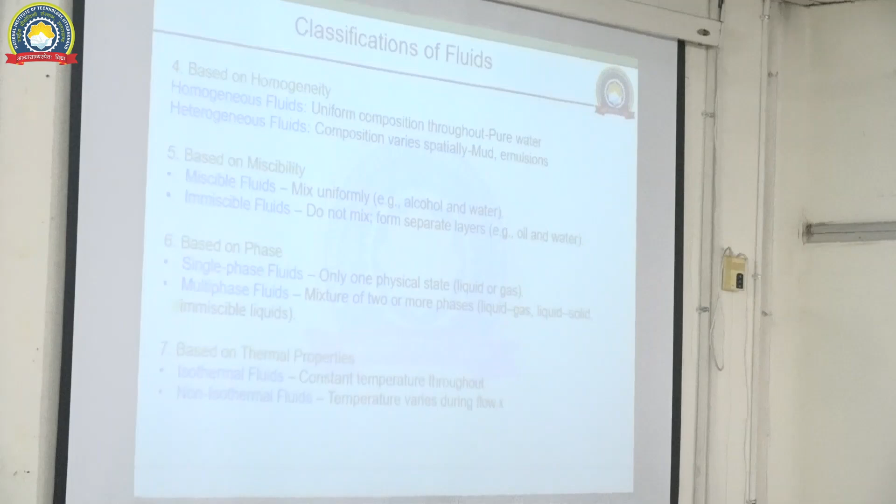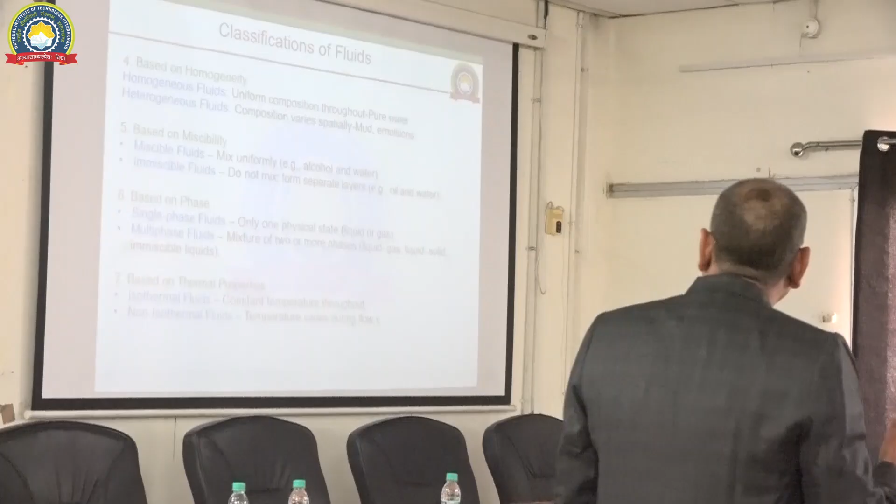Based on the homogeneity, whether the mixing of the liquid or mixing of the properties are there for the liquid, you can define the fluid as homogeneous fluid or heterogeneous fluid. Examples are there, you can read and see what type of fluid can be homogeneous in nature and what type can be heterogeneous in nature.

Based on the miscibility, when two different types of fluid are mixed, if it is completely mixable, then it is a miscible fluid. If not, examples are there like water and milk. If you mix both, it will be the case of a miscible fluid, and when you consider water and oil, it will be the case of an immiscible fluid.

Based on the phase, like different layers of the fluid, when one chemical or three to four chemicals are mixed, it can form layers. One example you can see is blood, where there are several layers like RBC, WBC, and plasma, and these are different layers. If it is only one layer, it's single phase. If two layers, two phase, three phase, four phases can be seen. So multi-phase fluid and single phase fluid you can define.

Then based on thermal properties, if there is no change in temperature, meaning it remains the same or constant throughout different compositions, reactions, or mechanisms, if you apply any type of force or chemical reaction and the temperature remains constant throughout the experiment, that type of fluid is known as isothermal. The opposite, if there is a change with respect to temperature, gives you different types.

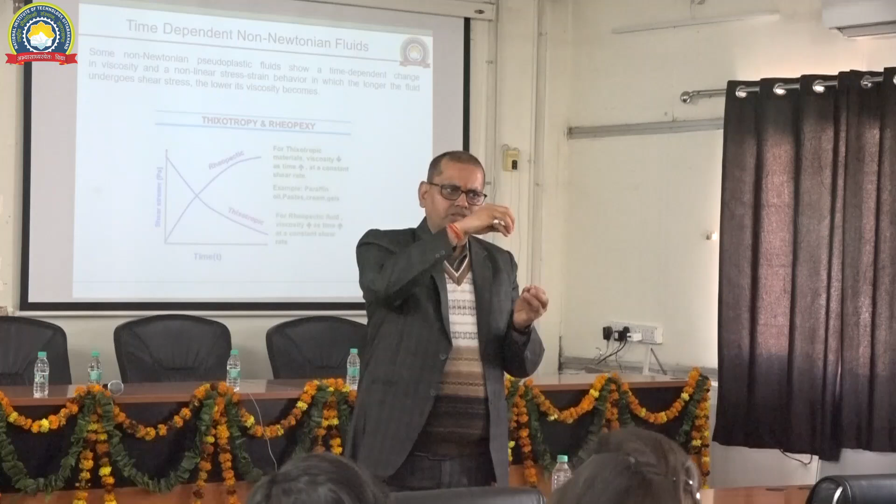So that type of knowledge should be there. So what I was talking about was fractional calculus. So in fractional models, now people have applications when there is transformation from one state to another state, or transformation from one domain to another domain. They are describing it from 0 to 1. Like if it is 0, then it is one state, and if it is 1, then it is another state. So they are using the concept of Boolean algebra from 0 to 1. The value of alpha ranges from 0 to 1, and they describe different models, like a fluid model.

But still, as I told you, the geometrical interpretation - we can define dy/dx as a tangent, as a slope, and we can also use it to define the geometrical shape, whether it is convex, concave, or finding the maxima and minima. We find the critical nature of continuity. So all these geometrical properties you can find using simple derivative. But for the fractional derivative, if it is d-half y upon dx-half, what will be the geometrical properties?

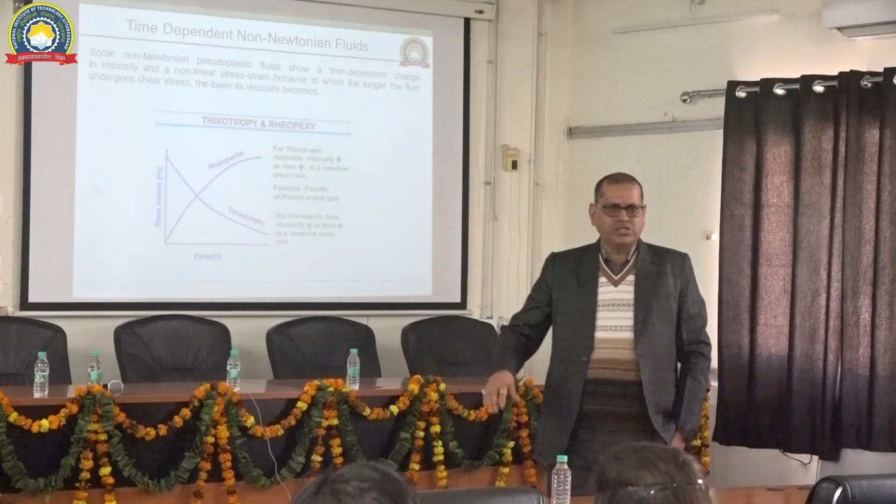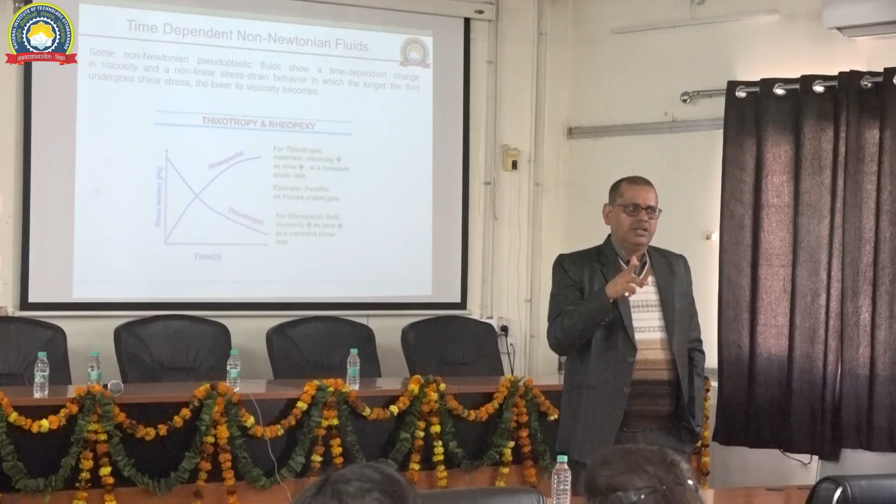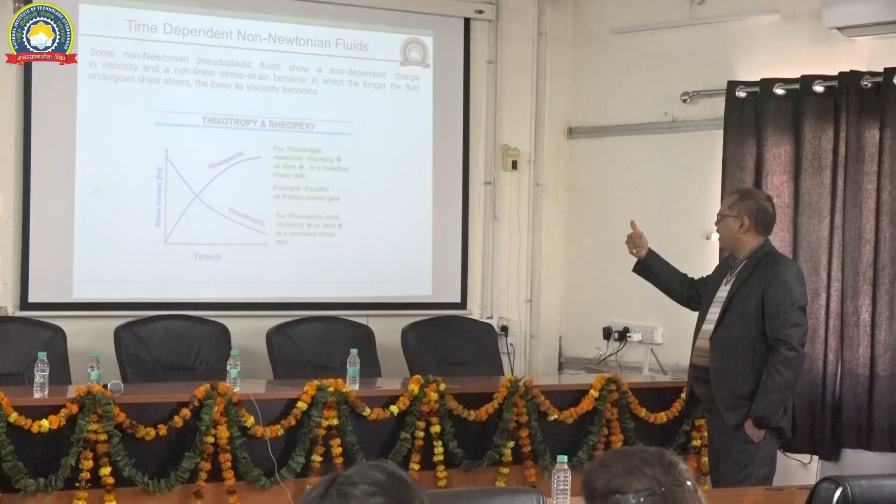These are the different models where you can see, and as I told, if the viscosity is depending upon time, you can describe different types. In time dependent non-Newtonian fluids, only two types exist, and very few people work on this. One is thixotropic and another is rheopectic. In these fluids, viscosity is the property which depends upon time - in one case it increases with time, in another case it decreases with time.

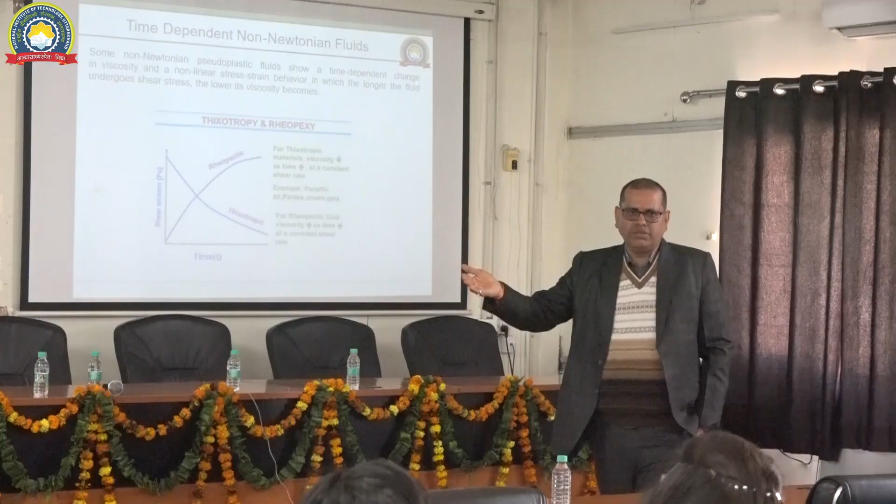This is another type of nature. Some models I have not taken the expression for, but you can find where people are working, taking different fluid models in different types of applications and analysis. One reference I have given you where you can find this is based on food products.

Most food products you can find in lunch, dinner, and for animal foods, for other living organisms, different types of food products exist, and you see what will be the rheological or physical properties of those food products. Many people are working on their purity and digestion purpose, figuring out which food is comfortable for a particular reason.

That's why different regions have different food cultures, and people eat based on the environment and depending upon water properties. When you are habitual to Uttarakhand and go to another place, you can have problems for a few days, and again you become habitual because your biological system adjusts with these properties.

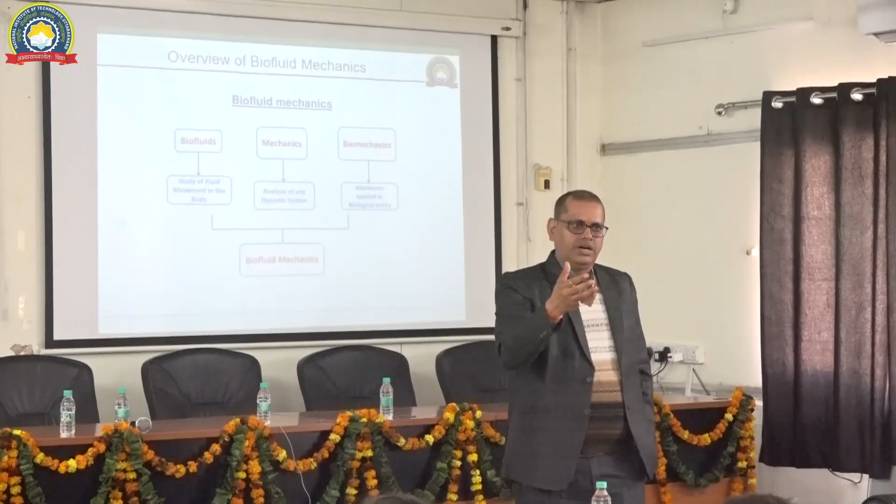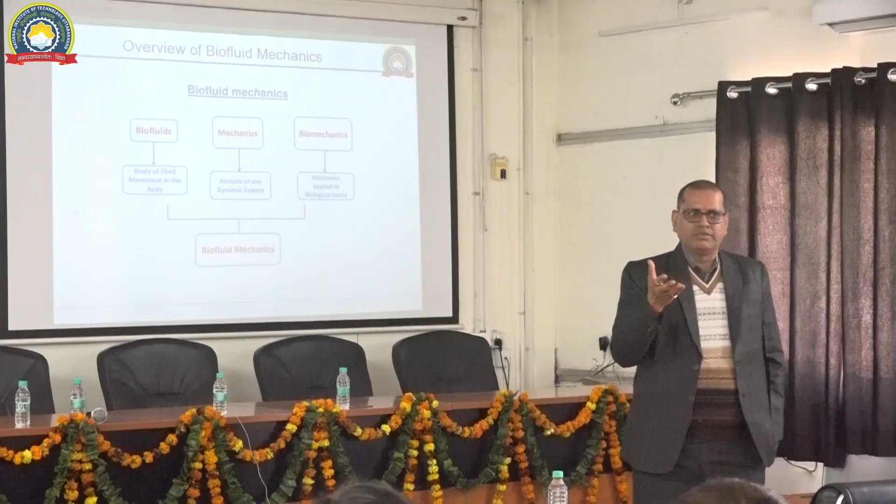So whatever the subject, even bioinformatics, you can find out biocomputer science, like some of the biological, but bioinformatics is there. Bioinformatics, all the data. There is a term for biocomputer science. It's called computational biology. Computational biology is the computation of the biology. But I am thinking what type of biology can be used for the computation, and they are working on that. So many terminologies you can describe and find out.

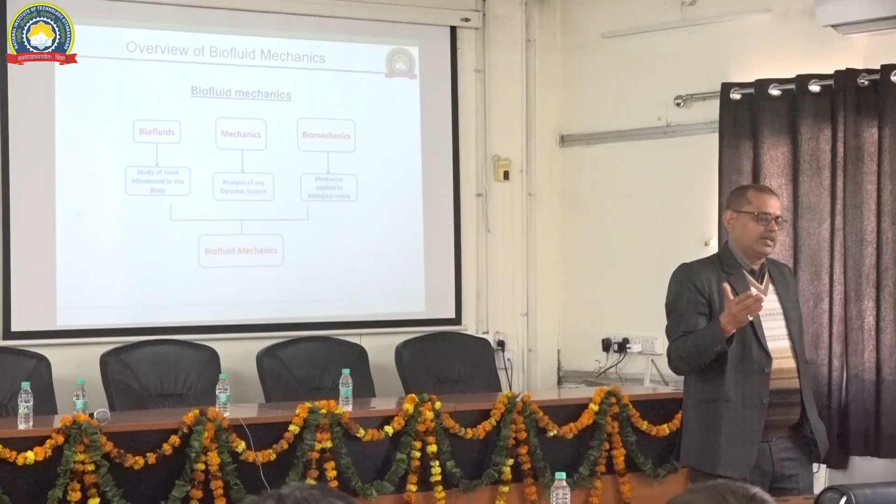So here, when we do the biological study in the form of mechanics, in the form of fluid, it is biofluid mechanics, biomechanics, because in mechanics, as I told, the concept of solid and the concept of statics are there, so you can consider it as biomechanics. And a very important book of biomechanics is written by Fung. You can search Fung, and the very basic concepts of biomechanics you can find from there.

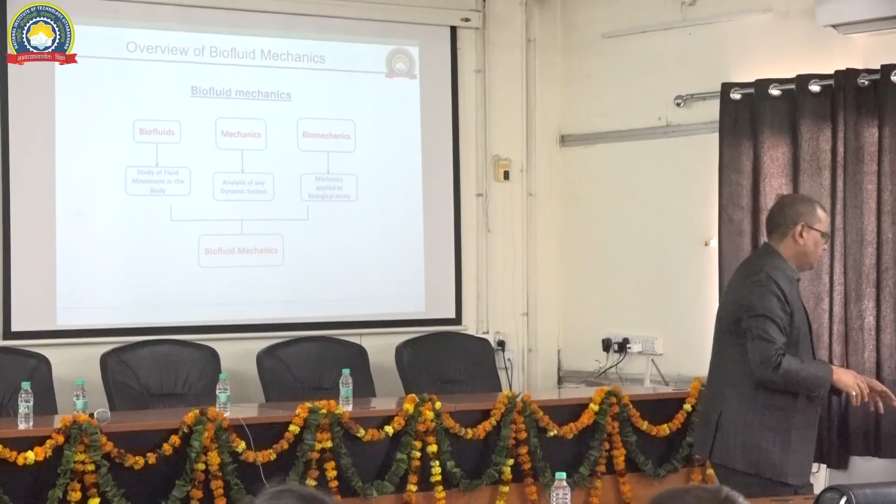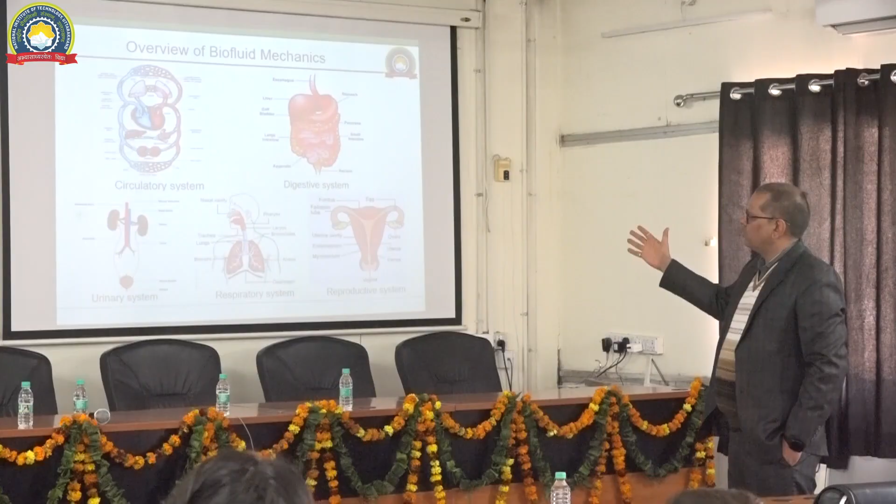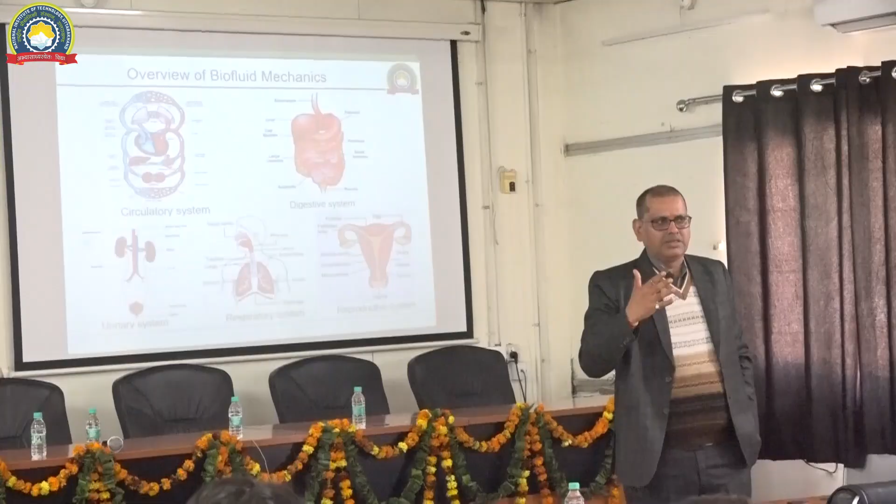So these are the basic systems; in the human body or animals you can find most of the systems are based on mechanisms, and many mechanisms are involved in the system where you can find the fluid flow, the biological fluid flow, and see how complicated or natural or complex their flow regimes, their mechanism, and their structure are.

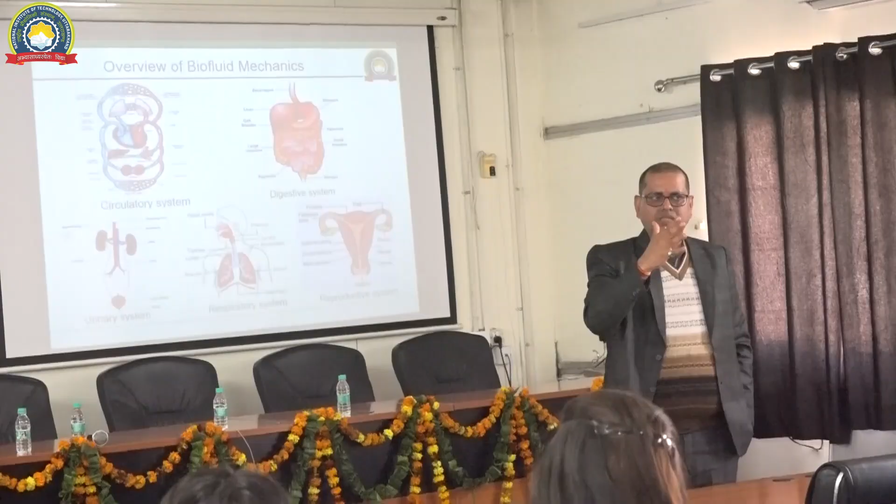So the first thing is how we can geometrically define the structure. The second thing is how we can mathematically think about the mechanism, or how much physics is involved in this particular mechanism, and then we can think about the problem, like whether we are considering a small part of the vessel or the complete system, because when you consider more phenomena, more mechanisms or a larger system, it is difficult to handle. But when you consider a small part, a small channel and some of the mechanism, then it is easy to handle.

And first, which is very important, is the circulatory system. The circulation of the blood throughout our body is under the circulatory system, where the pump is the heart, and the heart pump is a natural pump. There are no external devices, and that's why during an attack, if there is a blockage and the heart is not properly working, we are pushing in an external way, or giving some external force so that the blockage can be opened, and then the heart will start working properly.

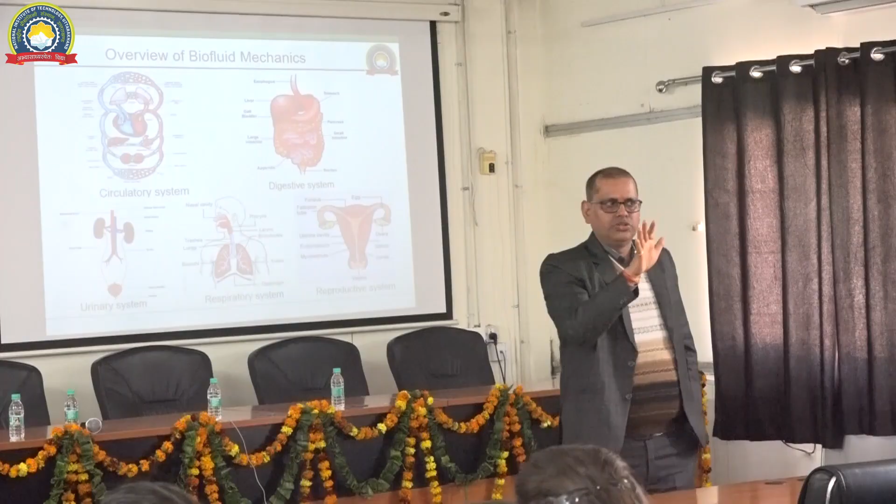So if you have the knowledge of how much pressure or how much force is required to propel the blood, then you can think of some external devices, some external force arrangement, and control the complete circulatory system. When you have the complete data set, because different age groups, different people, different personalities have different mechanisms and different rheological properties of the blood, it is not easy.

Suppose my heart is pumping in a different way, not completely different, but in the range of frequency, my frequency is different from your frequency, and the rheological property of my blood is different. That's why blood is categorized into different groups. And the same thing you can see at different levels, age groups, like for kids, for adults, for old people. So it is not easy.

So getting a large amount of data and thinking about what will be the normal range for different types of people, different aged people, and how you can control such mechanisms externally. When we have a large amount of data and think of an externally fitted chip or devices to control the circulatory system, the complete circulation in our body, that will be another advantage. And you see one example during COVID and now also, when the oxygen level is low, how it is controlled through the ventilator.

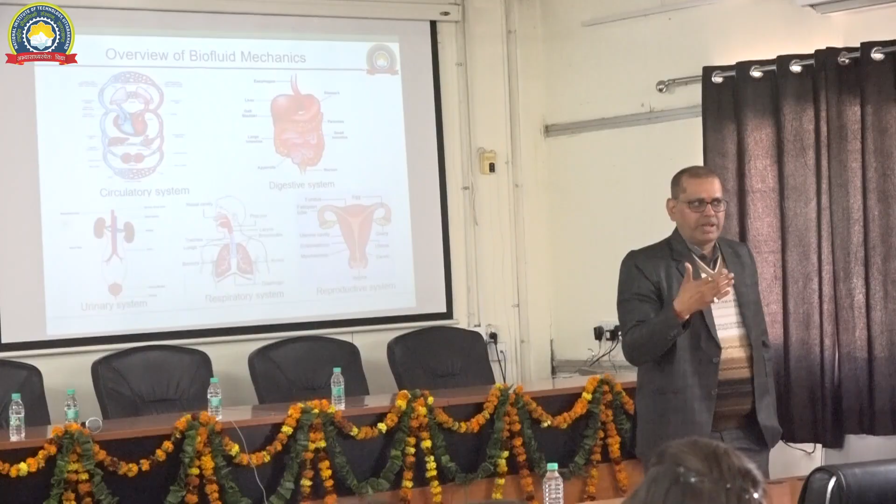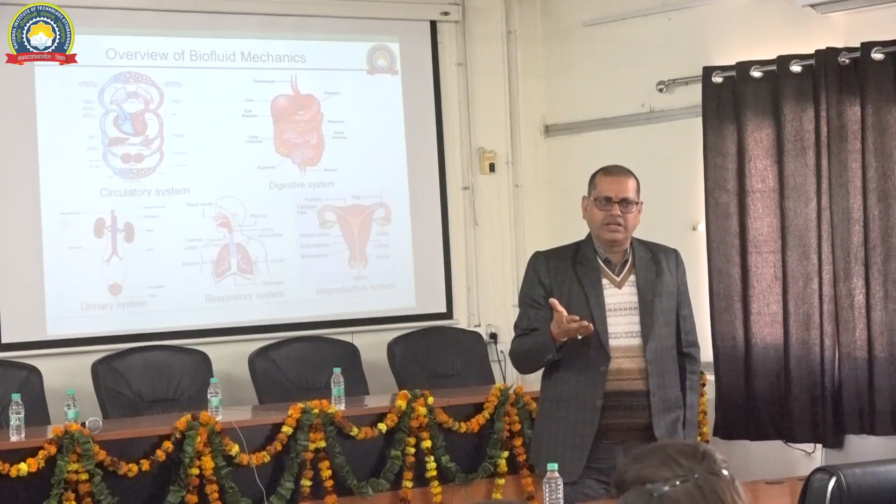Then the mechanism. One part is the nomenclature of the parts. Another is the mechanism or mechanics of the different parts. The mechanics of the different parts is known as physiology. So anatomy and physiology are the two different branches of biology where you have to study, whether it is botany or zoology, okay, and think about what type of mechanics are involved, what type of phenomena are there, and then you can formulate it mathematically and see. So these are some examples.

The second is the digestive system, starting from eating to the exit of the waste: the complete digestion, the esophageal movement, digestion in the stomach, then the formation of the chyme and the movement of the chyme in the small and large intestine, and the different structures, chemical reactions, physiological phenomena, and physics there. So you cannot consider everything in your mathematical model, but you can consider one or two aspects in your analysis study and try to do it. Okay.

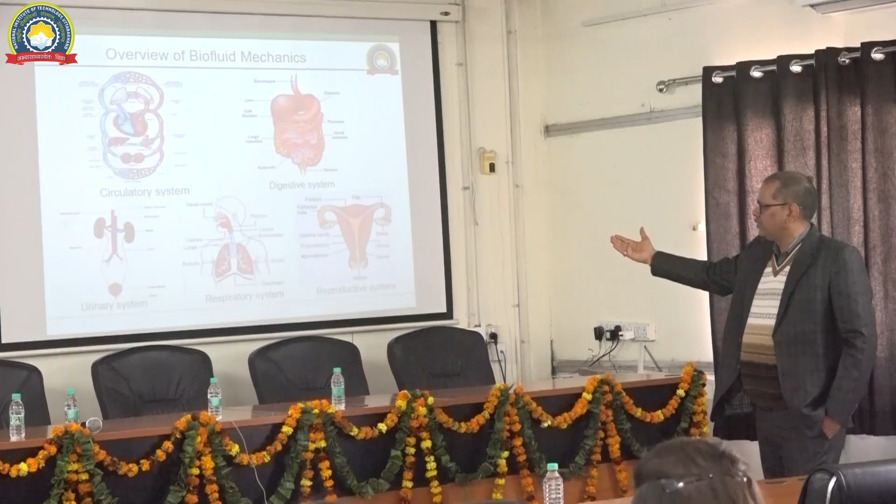Then other systems you can see, like filtration of the blood through the kidney and the waste as urine, urine flow through the ureter, then the breathing process as we discussed in the respiratory system, and then the reproductive system. So these are the major parts where you can see the different physiological phenomena, and this is the overview.